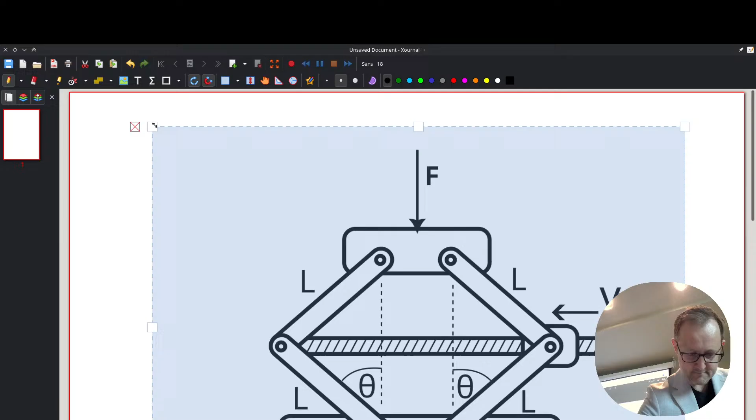Do you know what this is? Yeah, a jack. A jack? Yeah. What do you use jacks for? To lift up cars. You could lift a car. Yeah. Why do you use a jack like this?

Couldn't we use a lever and just, like... A lever you have to hold in place with something else, but the jack just holds itself in place. Holds itself, yeah. It's a lot more compact for the mechanical advantage. A lot smaller for the mechanical advantage.

Oh, okay. So with a lever, how big of a lever arm would we need? Let's say we're holding up 500 pounds, a quarter of a car. How big of a lever do we need? Depends on how much force you want to apply to lift it. Come on, how much force do you want to apply then? What's your rough estimate? How much force can a person apply?

I know it depends. I know it does depend, and that's a great answer. It does depend. They could use their body weight. So you could have one person stand on the lever and the other person work on the car. I hope you trust that person.

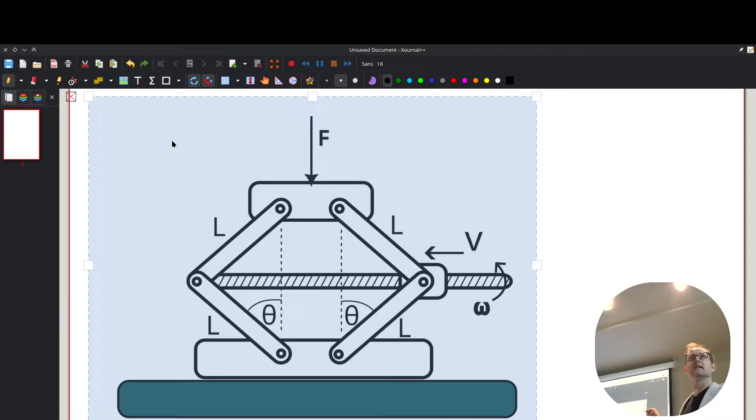We actually need it to be a small enough amount of force that it can't overcome friction, otherwise the car is just going to fall as soon as we let go of it. Oh, so in this case? Well, if we have a lever and we're lifting up the car, we need to apply such little force that it sticks in place.

Or we need to have some kind of locking mechanism. Yeah, maybe we have a pin or something. But it's actually the locking mechanism that's going to be the limiting factor as to how much weight we can use. Yeah, but we could use a big old steel bolt and lock it in place.

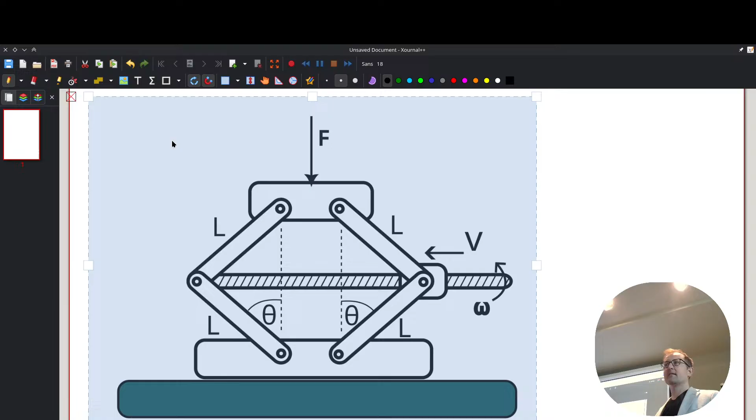So how much do people weigh? I weigh like 190 pounds. So 190 compared to 500. What's the lever arm difference to lift this thing? Call it 200 pounds versus 500 pounds. Right, so we have our lever. 200 pounds, 500 pounds. When are those equal?

You need the longer lever to be 2.5 times the shorter lever. 2.5, something like that. So if we have a 1 meter lever arm, then we need an extra 2.5 meters. So now we're talking 3.5 meters of lever that you have to jam into your car, or carry on top of your car.

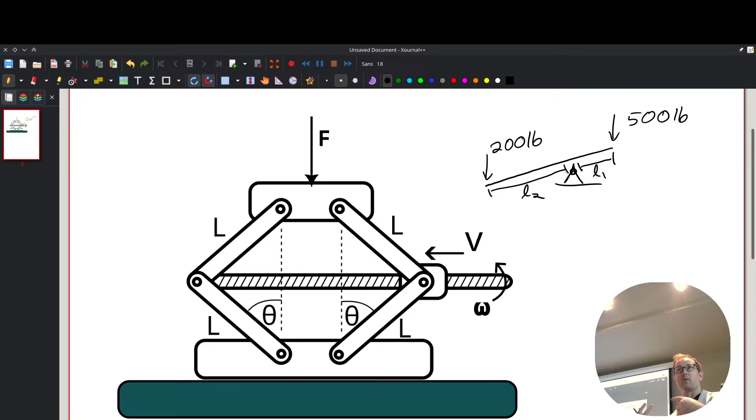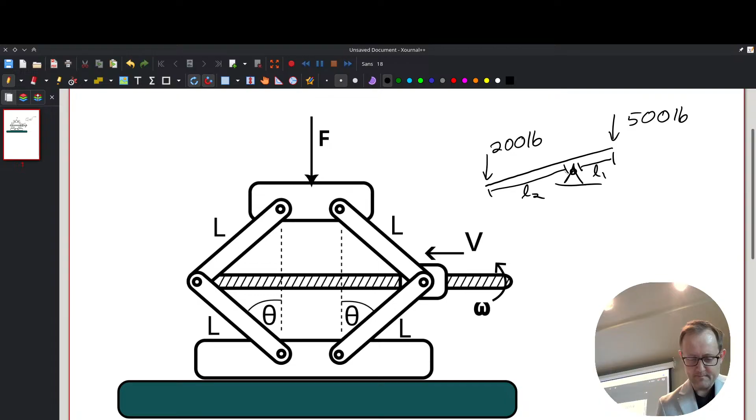So, as was brought up, we can make a much more compact system with a little car jack, which is kind of nice. And there are actually 2 different places where we're getting some mechanical advantage, and we'll look at those as we investigate this case problem. Sound good? Should we copy this over? I don't like screenshots, but I think it makes sense here.

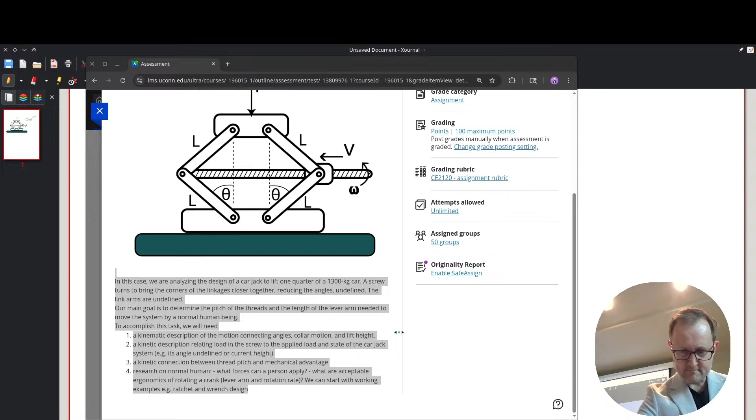Okay, so we're using a car jack. First, we need a kinematic description of motion. We should probably zoom in. So connecting angles, collar motion, lift height, all that kind of stuff. We need to relate what the load in our screw is. We're turning a screw to change how high the car is being lifted. So how does the screw move, and what is the load in our screw?

Then the next part is the kinetic connection between thread pitch, like how many threads per inch or per millimeter, what thread we choose, and also our mechanical advantage. And then to wrap this up, we need some research on what a human can actually do.

With a lever, we kind of know. If you stand on the lever, that's the max load you can apply, because you can't put your foot on something and apply more than your own weight, otherwise you lift yourself and not the object. In this case it's a little different, because now we can use a hand crank or something. What do we think so far?

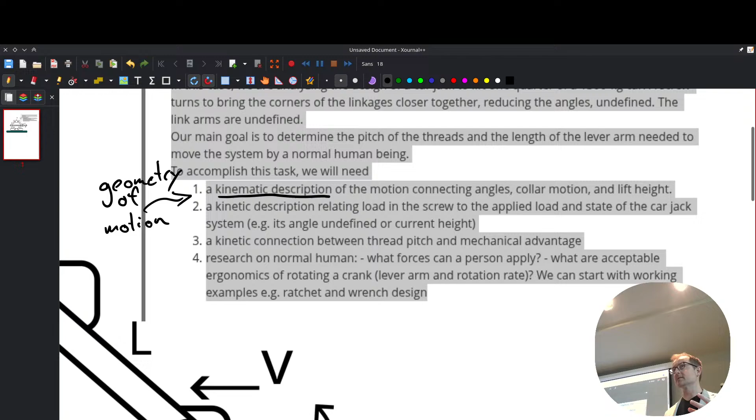Now some stuff is rotating, some stuff is moving forward. This is where we have to start thinking more deeply about what is the geometry of motion. How do we define it, and what are we doing there? So that's why I say we should start there. So what do we think? What is the geometry of motion here? What are some things we could start with to describe the geometry of this motion?

If you have something, go for it. It goes up and down. Yep, so it's definitely going up and down. So let's say we have that thing, let's call it our support, or no, it's not a support. What's the thing called that actually touches the car? Strut? No, the strut is in the car. A little pad. We could call it a pad. I like that.

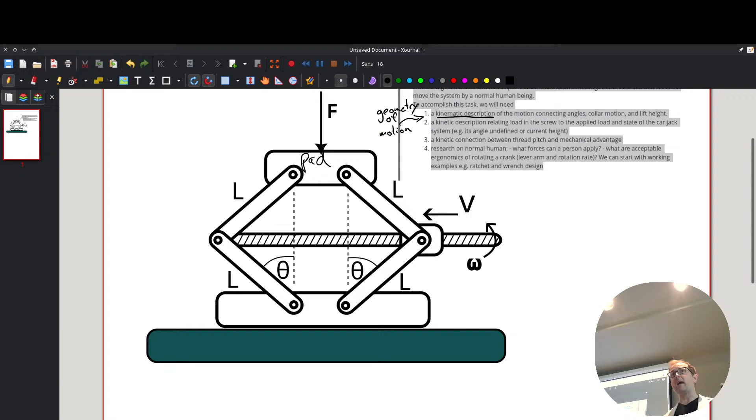So let's say the pad moves up. What happens to the rest of this thing? It's got to get smaller. Yeah, so angles have to decrease. Those two thetas decrease. Cool. So our arms get closer. All right, so take a minute. You don't have to know the answer, but I want to know where you're starting from, what you're thinking about in terms of how we describe this motion.

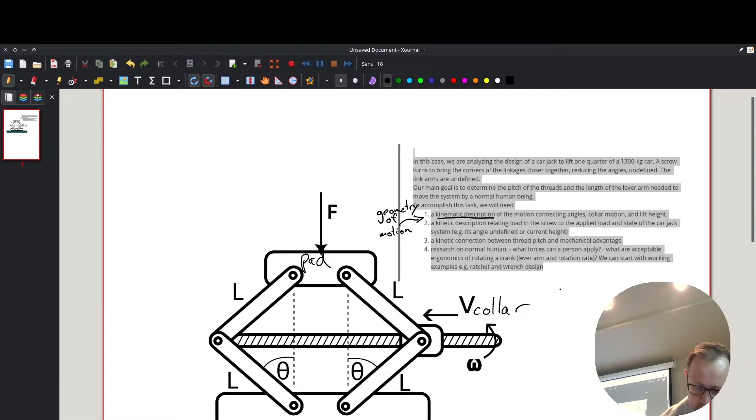So one thing we know here is that the screw turns the collar. Let's say the collar is moving at some constant rate, because that one we can control. We can run this thing at a constant rate. Let's say that's moving at a certain speed. What is the rest of the system doing? How do I connect that motion, that V, to upward motion?

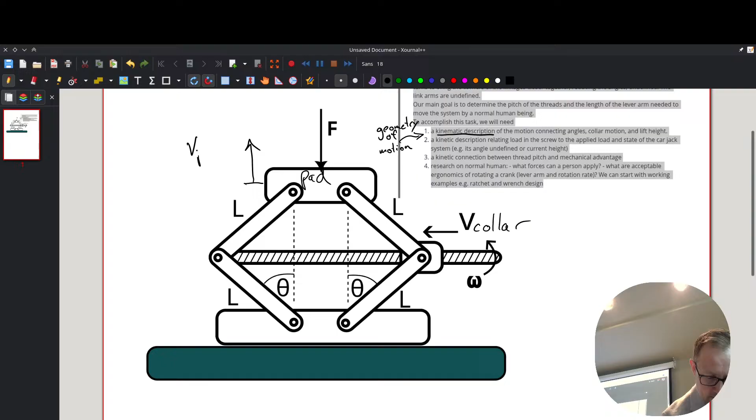So is it a function of that collar, that moving thing? What do you think? How do you connect those? What do you think so far?

I'm thinking if the jack starts from the floor and you start turning, it'll start to spring up like this, and then eventually reach straight vertical. Okay. So I'm trying to think about that in terms of the two extremes, like 90 degrees and 0. Okay. What was your starting point?

The number of threads will tell you that for every turn it'll move so many inches, right? Yeah, that's true. So we know how threads connect to collar motion, so we can connect that one. What do you think so far?

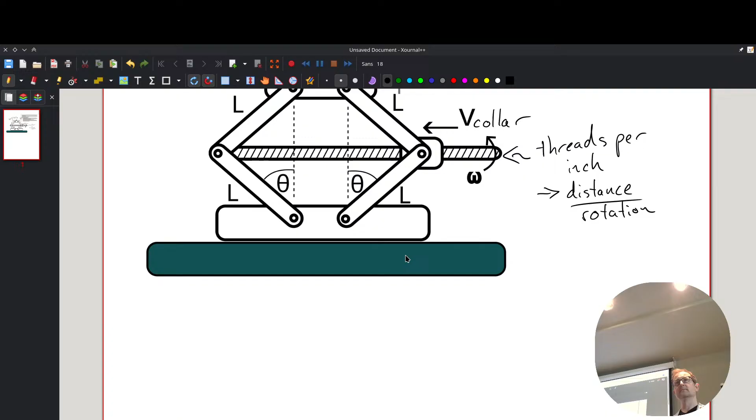Yeah, so this is a great kinematic, again, this is describing just the geometry. We had some talk about, will knowing the forces on this thing tell us the motion of this? And I'm trying to think of, like, the speedometer in your car, that is a kinematic description. It's telling you how fast you're going. If you know how fast you're going, do you know how much gas you're burning?

No. I mean, you know you're moving 20 miles an hour. Could you figure out how much gas you're burning based on your coefficient of drag and therefore how much horsepower you're putting out and therefore how much energy you're using? So if we have some kind of kinetic equation that relates speed to forces, then we can calculate how much gas it takes. We can figure out how much energy we're using. We know that our engine is only like 28% efficient, thermal efficiency. So then we could multiply that and get a number that way.

But with just a value of speed, it doesn't tell us what forces are being applied to create that motion. It's just saying, this is it. Same with GPS. GPS tells you where you are. It doesn't tell you that you're, I don't know, James Bond hanging from the side of a satellite. I'm thinking like GoldenEye, that giant satellite dish at the end of the movie.

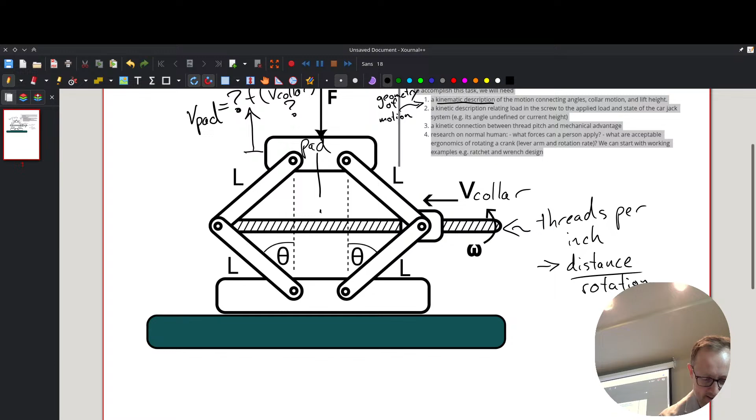What do we lose by saying there's mirror symmetry? Do we lose anything? Is this side stationary, the left side, since the collar's only on one side? Yeah, we only have the one collar moving, right? I do support the mirror symmetry, but I just wanted to know what you're thinking here. So we can say this is our mirror line.

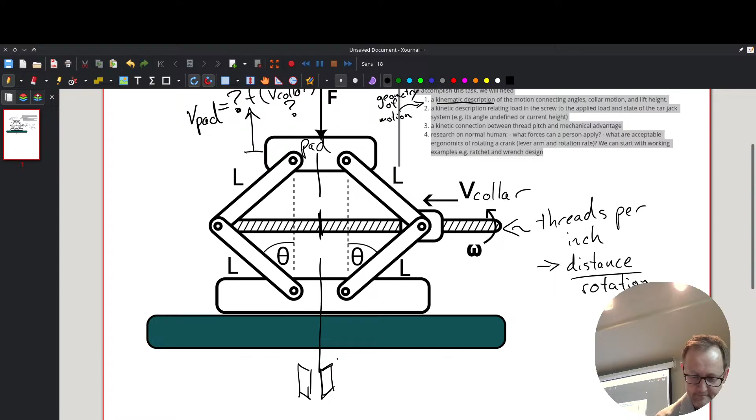But the question came up of, if this is, let's call this distance D, will this also be a distance D? That's the mirror, at least when I'm looking at that. And would that always be the case? Yeah. Only if we assume that our center screw doesn't flex. Yeah. So hopefully we're choosing a screw that's not buckling.

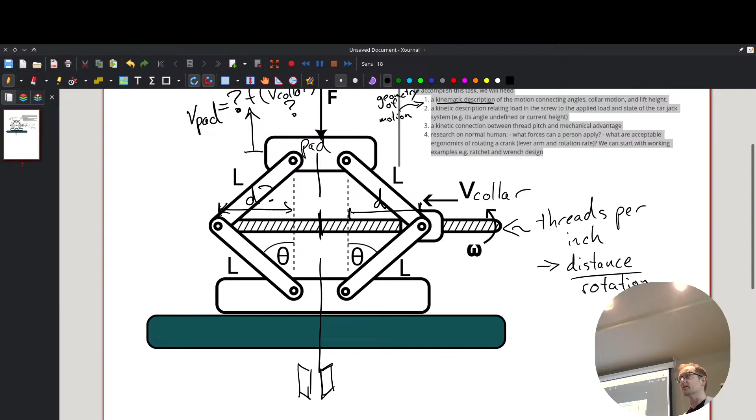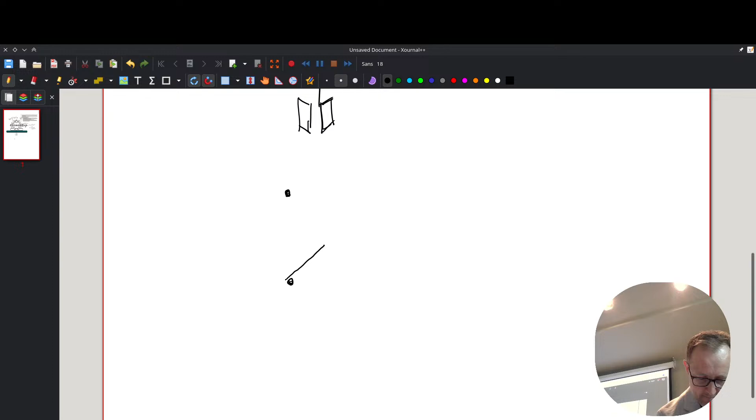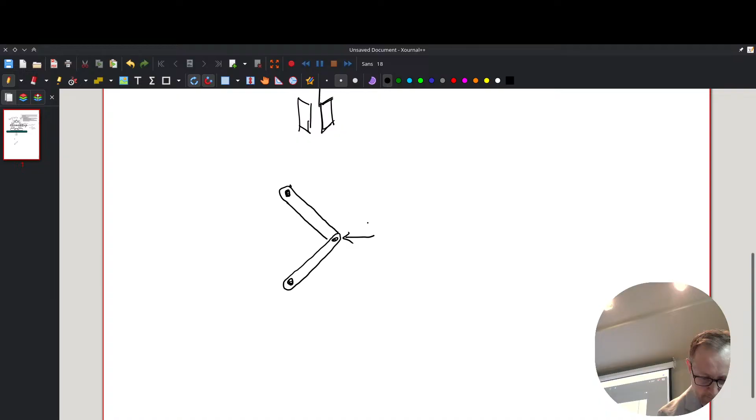Well, here it's under mostly tension, right? But it's not stretching or flexing. And so we do have some mirror symmetry, even though we're only driving one side of it. Cool. So I'm taking a simple drawing and making it even simpler. Now I have two moving parts, at least the things that I'm looking at. How does that look? Is it still the same diagram? Are we still solving the same problem?

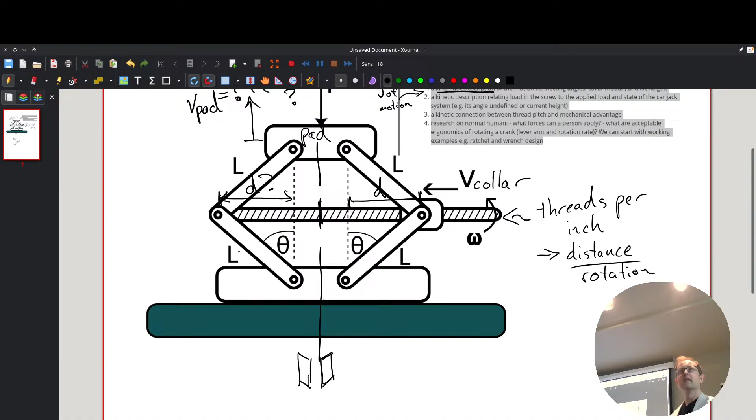Some people are staring at it like they're not sure. It's too simple. Yeah. I'm just not sure, if you go back to the split section, did you draw a wall at the pad, or is that just loose? So I'm scrolling back down to my diagram. The wall that I drew at hinge B is a sliding constraint, so it can move up and down, but it can't move left and right. Okay, yeah, that's fine.

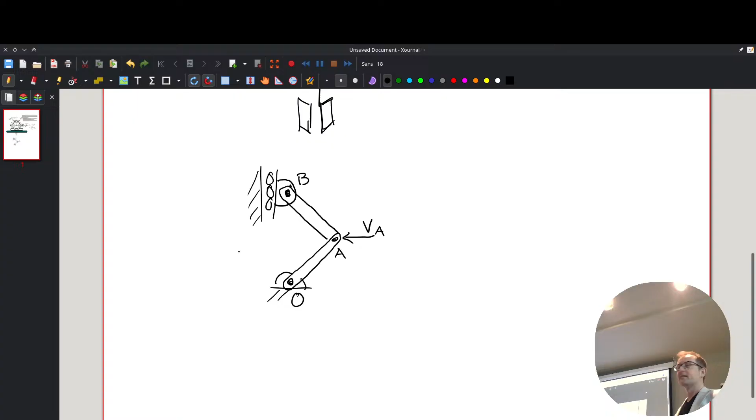Then we have L and L. So VA is some set value. Like if I'm moving it 5 millimeters per second, how fast does VB move up? Do we know? It's not immediately obvious. It's not like you should just know it. There's not an equation to look up.

For VA, are we talking about the linear velocity? Yeah, so a linear, like it's moving, technically it's moving to the left and up because A has to follow a circle, so it has to move in an arc. Let me see if I can sketch this up here. So it's moving to the left, but initially it's moving just up and to the left, something like that. We can say roughly constantly moving that way, because our threads are going to drive it that way at a certain speed.

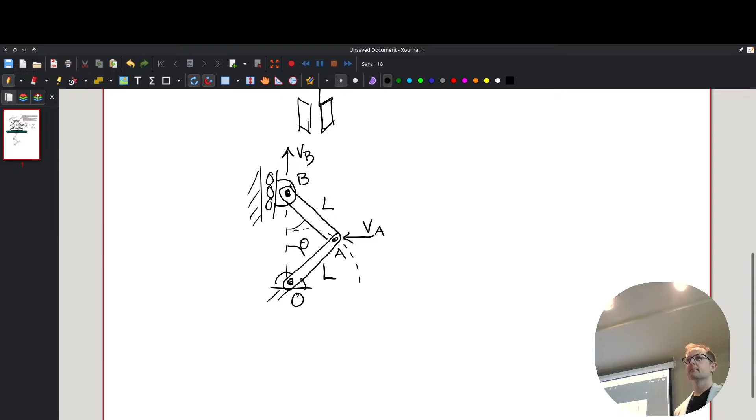If we assume some kind of angular velocity, say I'm spinning the bolt at this many rotations, can we go from there to threads per inch, and then basically use that as some kind of conversion factor, and then we could find VA? Yeah, so part of this is a goal of, where is it? We want to figure out what the pitch should be, how many threads per inch we need. If someone said, hey, it's 10 threads per inch and it's rotating at 3 rotations per second, then we could turn that directly into VA is moving this speed.

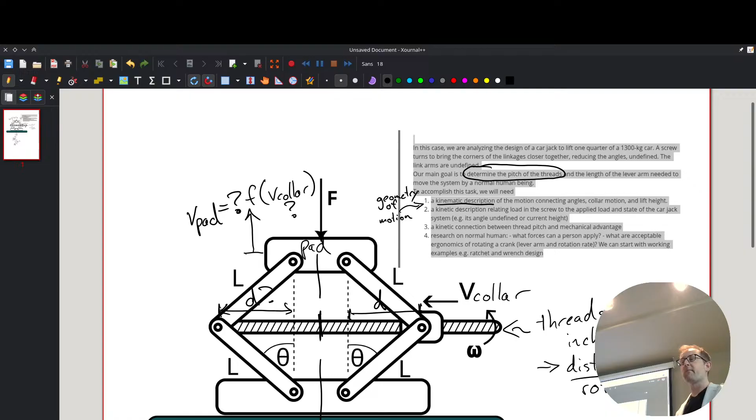And we could start there, like how we did with the friction in the first case problem. We could just say, these are the threads per inch, and I'm gonna solve for it. And if it turns out I need 3,000 pounds to move the thing, then we'll say, all right, let's increase thread pitch or decrease speed, something like that. Yeah. So, can you scroll back down? Yeah.

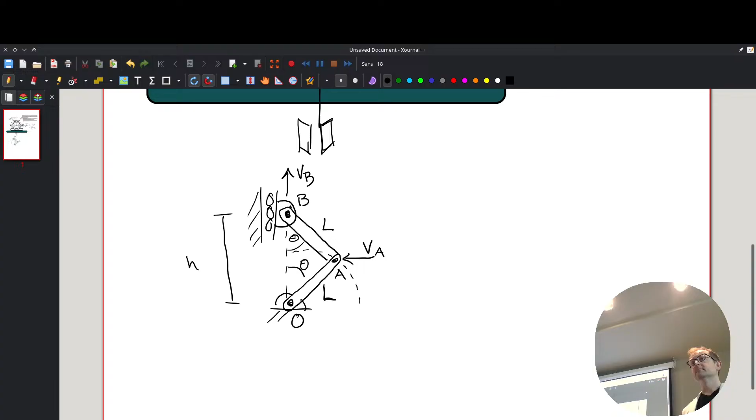The two thetas that show up, those are equal because the lengths are equal. So if you just figure out the other angles, those are the same. You can do whatever arc finds that length there, define that length, and then the difference. Yeah, so we could figure out how high this thing is, the height of our jack based on the angle. I think you could further simplify this and just split it in half to figure out the rate of change in height of the lower arm, and then double it because they're both L, and that'll be the rate of change of the height in total.

2 times L times, what do we think? What's the factor that we need for that one? I think you're right. If the thing is 0 degrees, it's going to be 2L tall. But if it's at 90 degrees, flat on the ground, then it's 2L times 0. So something like a cosine theta. Take that inner part. I like that.

So what we're circling around is this idea of how many degrees of freedom and how many constraints are on this system. If theta changes, everything has to change. Or if we say that A is moving to the left, then theta has to be some function of how it's moving. So we only have 1 degree of freedom. If we know that one thing, we can calculate the rest. It might not be easy, we have to do math to get it, but it's all connected in motion. Cool. So we could say H is 2L cosine theta.

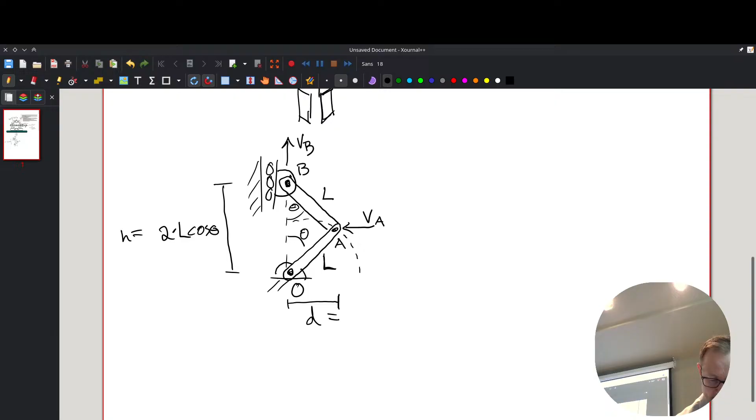What about this distance? What do we call that here? D? Do we know how big that distance is? Could we not just do L sine theta? L sine theta? That's what it looks like, right? We're using some trig to figure out how this motion is all confined. This was awesome. Within a few minutes, you figured out what the constraints on the motion are. So now everything is a function of theta. That could be our one coordinate: if I know the angle, I know everything about this system. So we have constraints, we know how they're changing.

I'm putting some vectors in here. All right, we know how to describe that height. We know how to describe that position of that second hinge. And I started labeling things just because I find it easier to have labels for my hinges as they're moving around. If you want different labels, you can label it your way. I like OAB: origin, A, B. B moves up and down, A kind of swings around in the circle.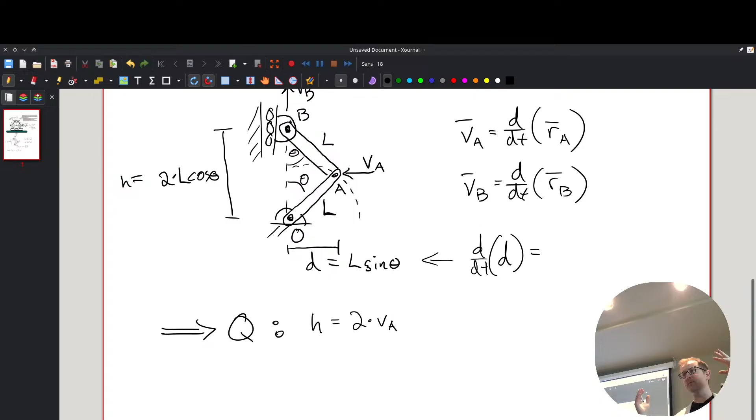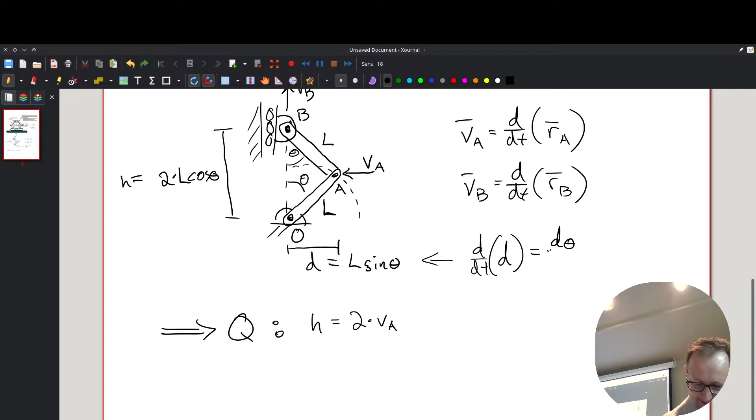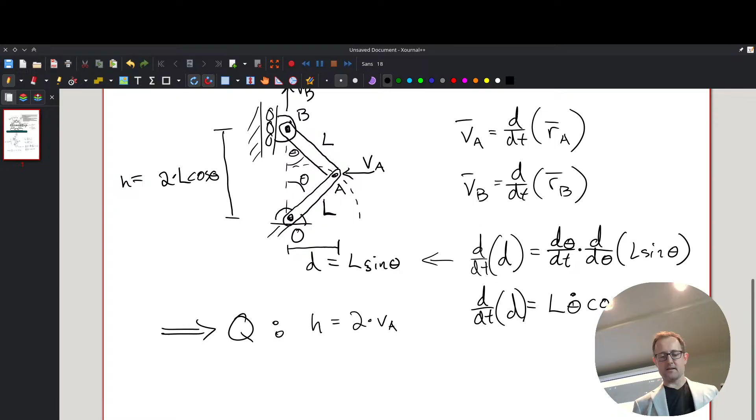All right, so we've got to rearrange this a little bit, right? Chain rule. I warned you, I'd be yelling it out randomly. Does that help? Like that? How does that look? Copacetic? Usually, if you're taking derivatives of motion and angular motion, you end up with some kind of theta dot term in there. Especially anytime something's rotating on a hinge, there's almost always some kind of theta dot dependency. Let me scroll down a little. It's just my beautiful face blocking all of our hard work. Theta dot cosine theta. Something like that.

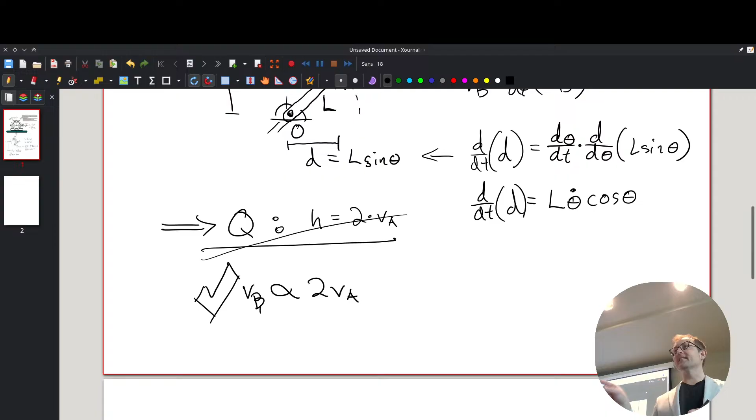Cool. This was a great start. I don't think we can say that height is directly connected to velocity, but I do think there is a connection between the two velocities. If one's moving one speed, the other one's going to move 2 times something times the other speed. We're getting close: somehow there's a proportion between 2VA and VB. We'll pick that up. Alpha? Oh, proportional to. It's a fish. Proportional fish.